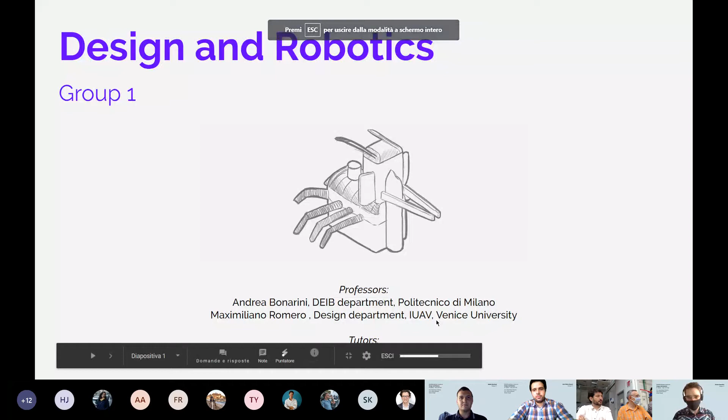Good morning. I'm Alessio Gauzolino. I live here in Milan, and I have a bachelor's degree in product design, and now I'm in a master's course. During the project, I developed the design part, assembled all the components, and made the tests for the behaviors and the electronic components that were assembled on the robot.

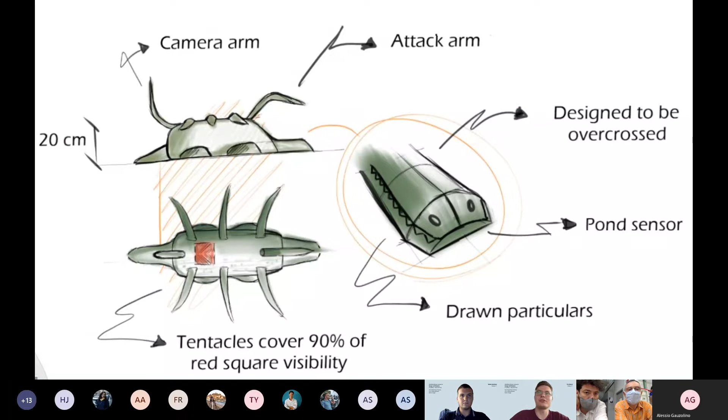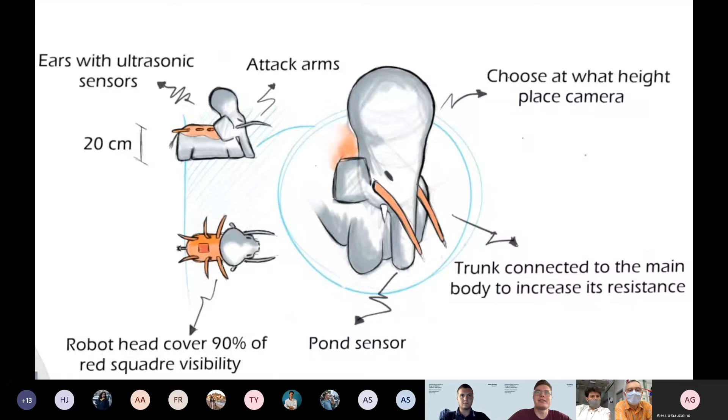Then we chose 2 animals. In this case, it was the octopus and the crocodile. We went further and combined also an octopus and a hippo, or an octopus and an elephant. But these very early ideas were not very satisfying to us. The problem was that we focused too much on only the appearance of the animals and their very obvious characteristics. We didn't find anything to distinguish them enough, to have a big enough contrast.

And that's why we went back and thought again about what animals we could combine. And the final solution was combining a crab and an elephant.

Because in our opinion, they have a big enough contrast in terms of strategies and behaviors that we could use in a helpful way in our robot. For example, the elephant is more of a strong and smart animal. It's very heavy, and for our research, we learned it's also emotional, which was important to us.

On the other side, the crab is very flexible in its movement. It can move sideways and forward. It's very fast compared to its size. It has a very protective behavior about its territory, which was important for us, and can be very aggressive, which could be helpful for our attacking. That's what we thought. So we combined the elephant and the crab, and the outcome was the Elecrab T-100, our robot.

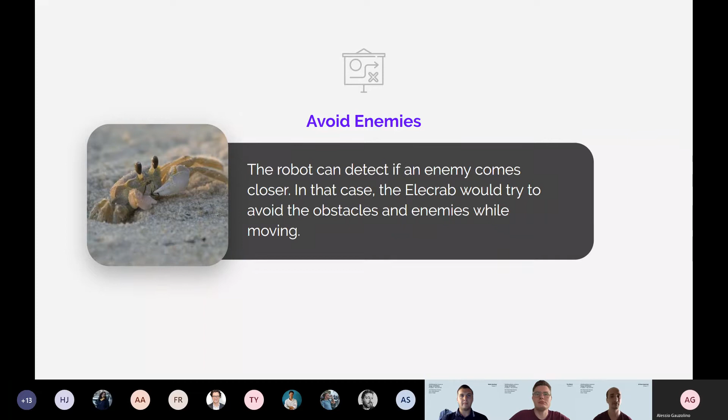So we make it hard for the other enemies to attack us at the same time. The other one is we should be able to avoid the enemies, where we can detect with the sensors where the enemies are coming from, and should be able to run away from them or attack them whenever it's needed. The next one is to protect the territory, so when enemies are coming close to us, we should protect some area around us to keep us as safe as possible.

To be able to accomplish this, we decided to use a fuzzy logic controller, a higher level controller which decides the behaviors depending on all the inputs that we give to the system. I will not go into detail on each of the flowcharts, but I wanted to focus on 2 of them, the most important in our opinion.

First one is going to the pond. So when we have the pond in our sight, we should be able to move towards it and also evade all the obstacles that are on the way. It can be enemies or other obstacles.

The next one is drink and defense. We think this is also really important. When we are drinking, the enemies can come close to us and attack us at the same time, so we should be able to do a fast rotation when we're being attacked, or move away from the enemies. That's what we have thought.

For going into more detail about the fuzzy logic, we have 4 fuzzy logic inputs. The first 2 are is-drinking and is-attacking, which are just Boolean, very simple values. The third one is being-attacked, also a Boolean value. We also have a pond distance, where we can understand the pond is close, medium, far, or unknown distance. Unknown distance means we don't know where the pond is or it's too far away. We decide our behaviors depending on these inputs.

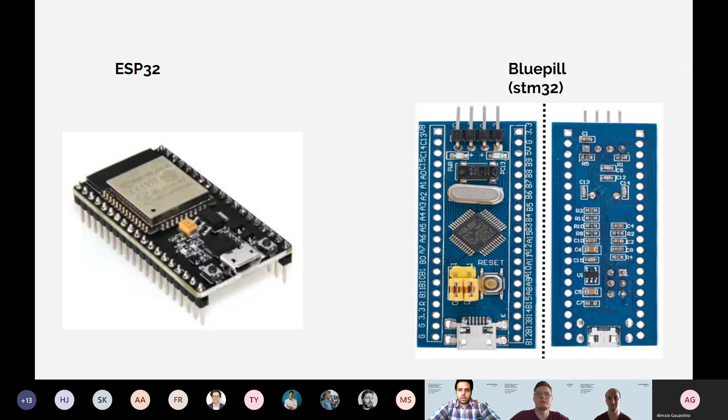Due to the limitation of time, I started to design the PCB with the Altium Designer application before the electronic parts arrived.

After they arrived, I talked a lot with the coder Mattia, and we started to test all the components together. After we made a PCB, we understood some pins of STM32 and ESP32 don't work properly when we connect the pins on the PCB.

To fix this issue, I soldered some wires on the back of one of the PCBs. But because it wasn't stable and neat, we decided to make another PCB.

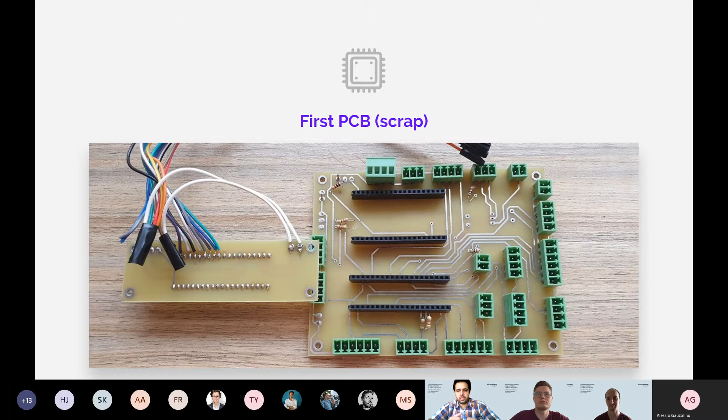We started testing remotely, and then I sent the components to Milan from Iran, and we started testing all the electronic steps with the PCBs.

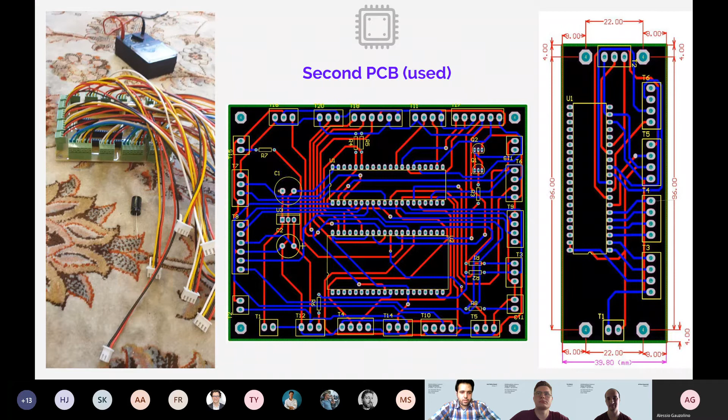Now, my colleague is going to talk about the sensors.

These are the sensors used in our robot, and now I'll describe them one at a time. First of all, the robot uses 6 ultrasonic sensors to detect obstacles around it, and also to avoid walls and find enemies, both to attack and defend. They are arranged all around the robot with more density in the back, since the head is more protected thanks to the ears.

Then the color sensors help the image analysis to detect when the robot is drinking and when it's attacking. One sensor is in the bottom of the trunk, and the other is in between the tusks, in order to detect when we are attacking the enemy's target.

Then we decided to use 2 LED matrices to emulate the eyes, on which several emotions are shown depending on the state and behavior of the robot. Moreover, the matrices at the end of the challenge can also show the final score.

We decided to reproduce four emotions: attacking, defending, drinking, and a normal looking default one. In addition to the LED matrices, we emulate emotion also with the movement of the ears, thanks to 2 servo motors.

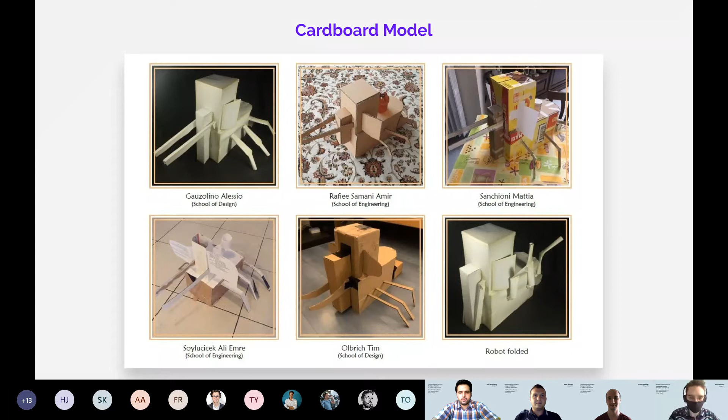Our project started with this cardboard model to understand the volume and the dimension of our robot. Then the process was quite interesting because we analyzed different kinds of materials, passing through a heavy robot made by metals and 3D printed stuff.

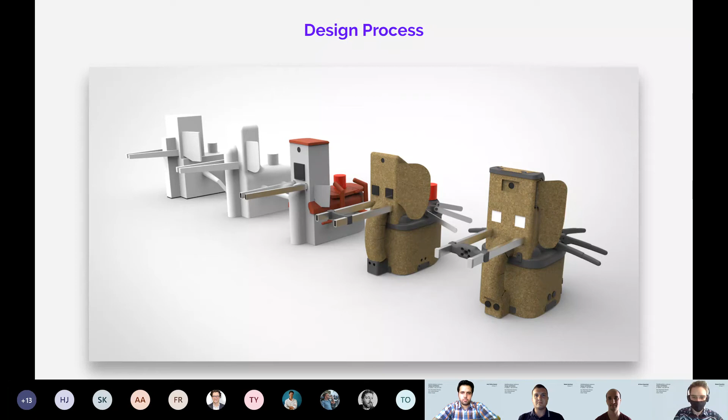Now we have another kind of robot that uses PLA and cork in order to better simulate the two animals we decided to represent. This is the previous step with the metal and the PLA.

Now we talk about the structure of the robot. The robot is made with a structure in plywood, and then some components 3D printed with a good tolerance, a small tolerance, in order to use as few screws as possible, because for the thickness of the plywood, which is only 4 millimeters, it's better not to use a lot of screws.

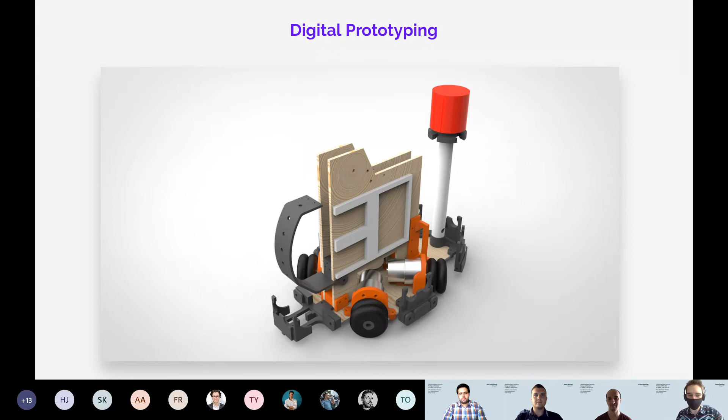Then to place the PCB, we use Forex because it's a material that can adapt easily to the shapes of the PCB and also to the pins on the back part of the PCBs.

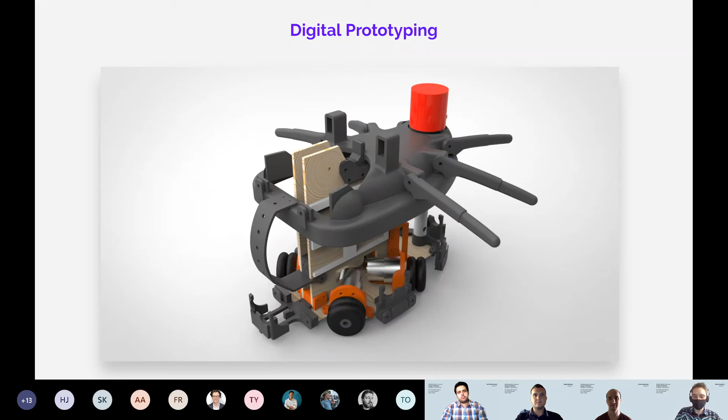Then to the main structure, we add the components 3D printed to recreate the shell of the crab. So we can see how the legs around the back part of the shell can be placed.

And then we have the head structure, which is where we put the ducts, the LED matrix, the servo motors, and where we also place the smartphone to see the pond and reach our objectives.

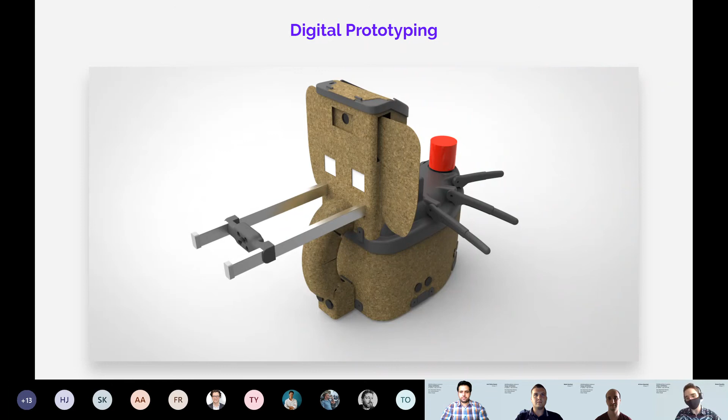So this is the final shape of the robot, with the cork parts that represent the elephant body and the skin, while the 3D printed elements represent the crab parts of the robot.

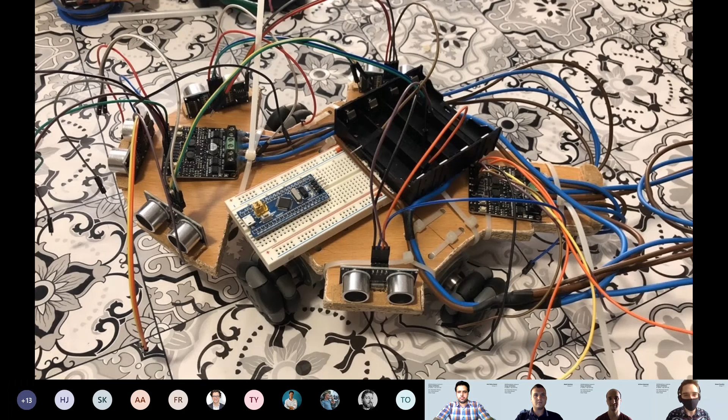Now we talk about the construction of the robot. While Mattia was working on the components in Rome, he reproduced the base of the robot in order to place the ultrasonic sensor in the correct position, and then he sent me the components, and I added the components to the structure.

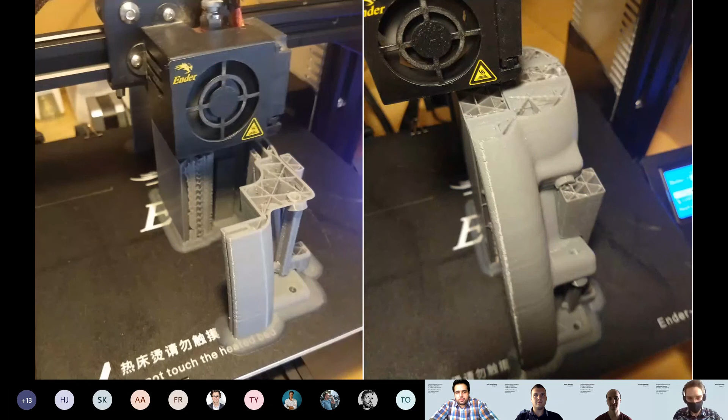These are examples of the 3D printing process for the shell of the robot, which takes more than 2 days to print, plus a lot of work and hours to design how to better produce this kind of part of the robot.

And then we placed the PCB that Amir sent from Iran. We made all the tests for the single components and understood how the components had to be positioned on the PCB with the cables.

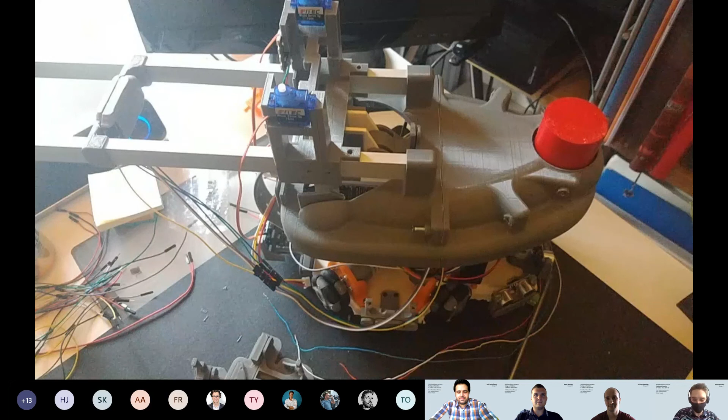These are images of me and Lee working while Amir and Mattia were connected through Teams in order to suggest how to proceed. This is the phase of development of the construction of the robot.

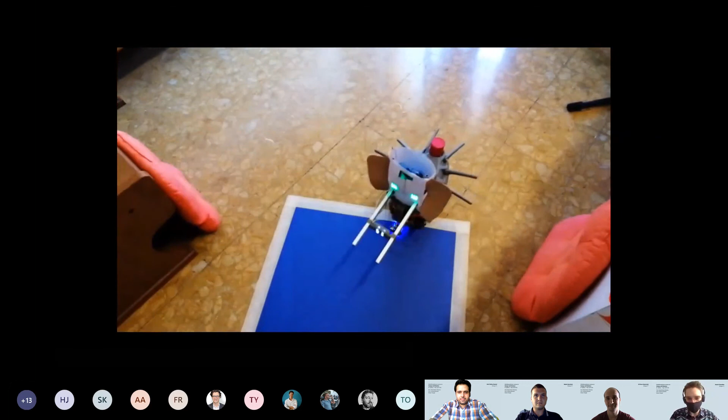And then we have a video that shows the behaviors of the robot. For the first one, we can see how the robot goes to the pond. We activate it, it recognizes the pond and goes there, then starts to drink, with the emotion shown in the eyes and also the sound.

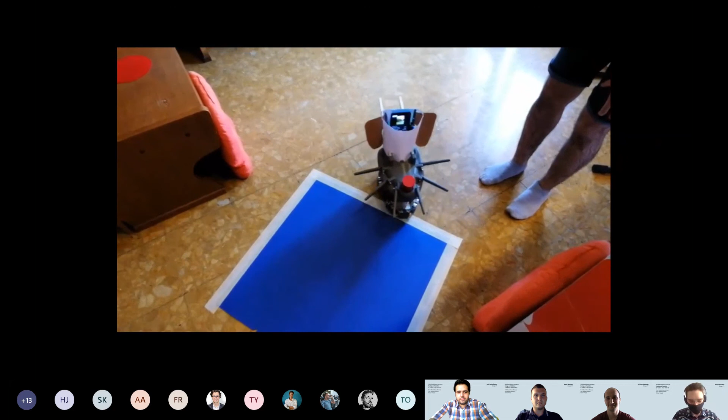Then there is a defense behavior, where when the target is attacked, the robot immediately starts to defend itself.

And then there is also the attacking phase, showing how the robot approaches the enemy's target with a show of emotions, and we can see how the robot gets always nearer to the target.

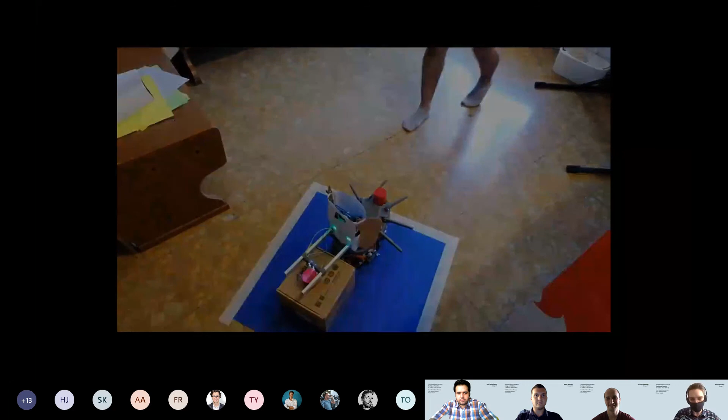And then we have some examples of the development phase and trials we had to do with the robot, which we call structure test, because we wanted to understand how durable and resistant it was over time as it goes through walls and everything all around. So thank you, and this is our robot.

Thank you very much for the presentation. It is very interesting. We are curious to see how it works, and congratulations, because it seems to be very, very interesting and very fine. Well done. Well done. Thank you very much.